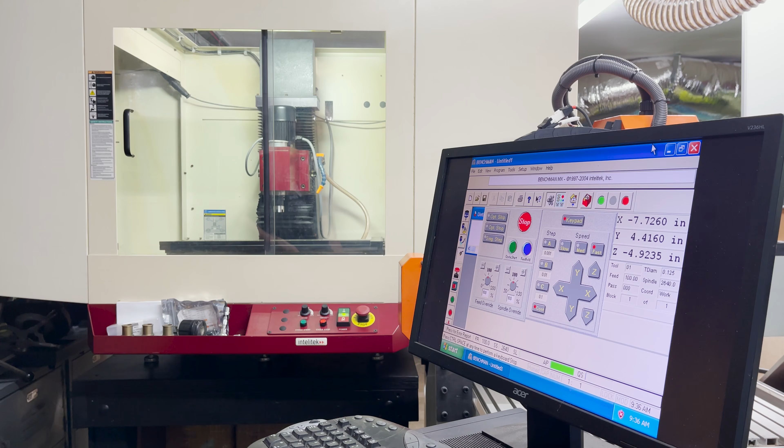Before starting any work on this Benchman MX, I jumped through some hoops getting this old Windows XP machine up and running so I could test out the machine with the original software. The software works great, however I'm a little apprehensive about moving forward with it, as if anything goes wrong with this old PC or the proprietary controller, I'm going to be out of luck getting any replacement parts. So I'm going to move forward with doing a full retrofit.

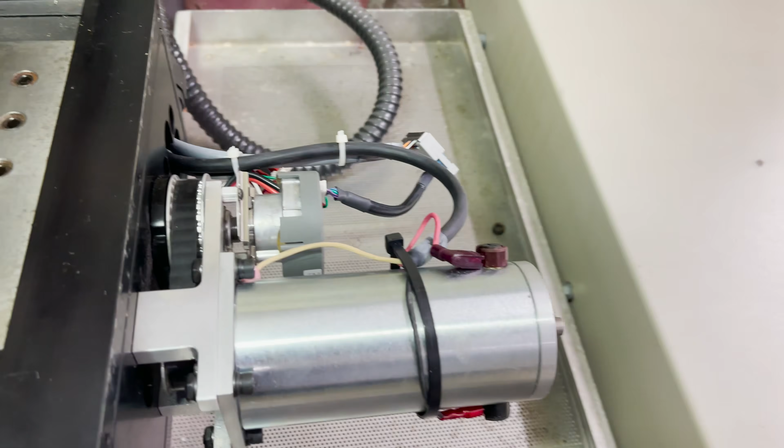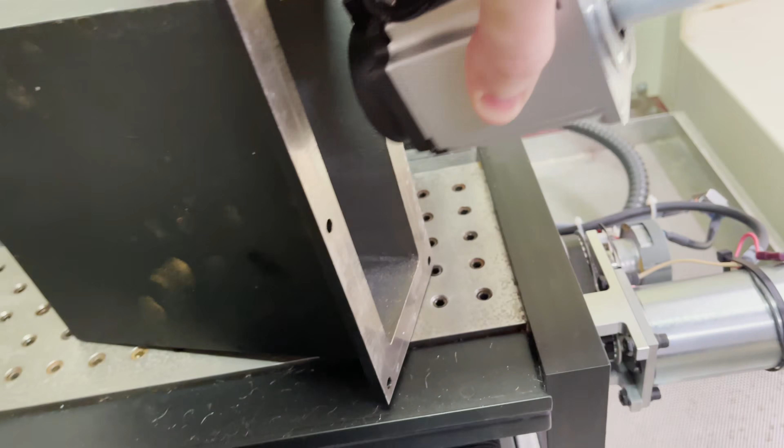So I took off the X-axis motor cover plate just to see what I'm working with here. You can see it's got a DC motor and then it's got a separate encoder. So the motors I was going to use are these AC servos, 400 watt, and it fits in here quite nicely, so I think that's going to be awesome.

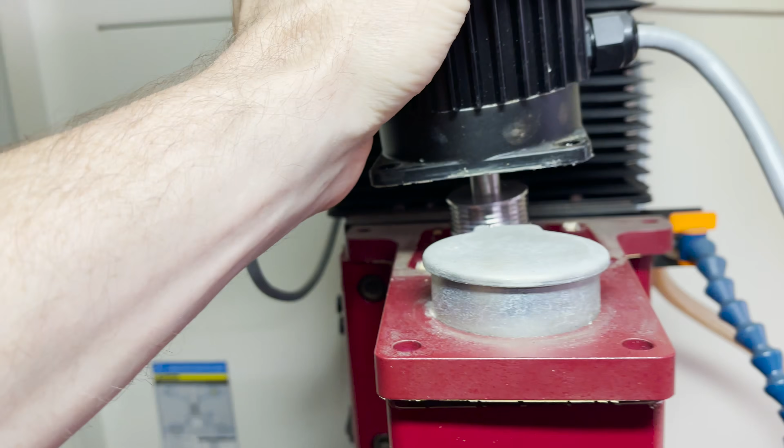I also took apart the spindle motor here. I noticed it wasn't working whenever I tried to test it. I don't know if it's the motor or the driver or who knows what. Anyways, I think I'm going to replace it with a 1 kilowatt servo motor.

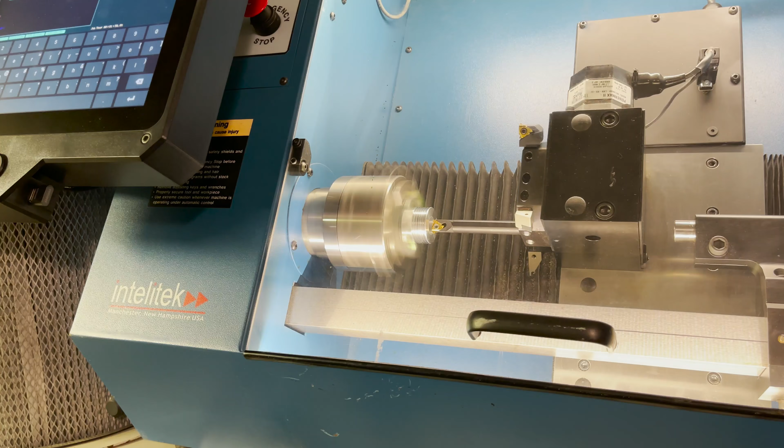See how that works? I've removed the pulley from this DC motor. I'm going to try to bore it out to fit this new servo motor. I removed the bulk of the material on the mill so I can fit my boring bar on the lathe. Alright, it looks like that's going to fit.

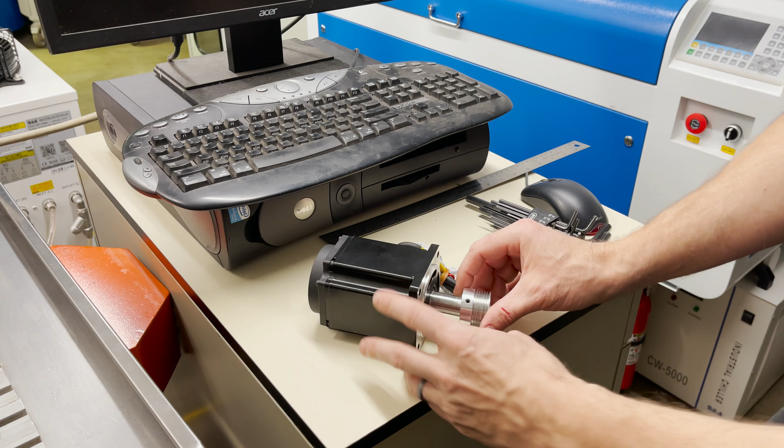Alright, let's get the Masso controller installed. I bounce around quite a bit in this project, as sometimes I only have a small chunk of time to make some progress.

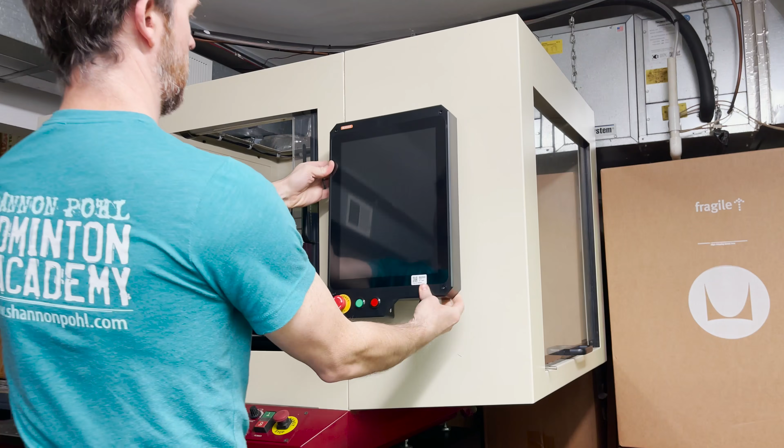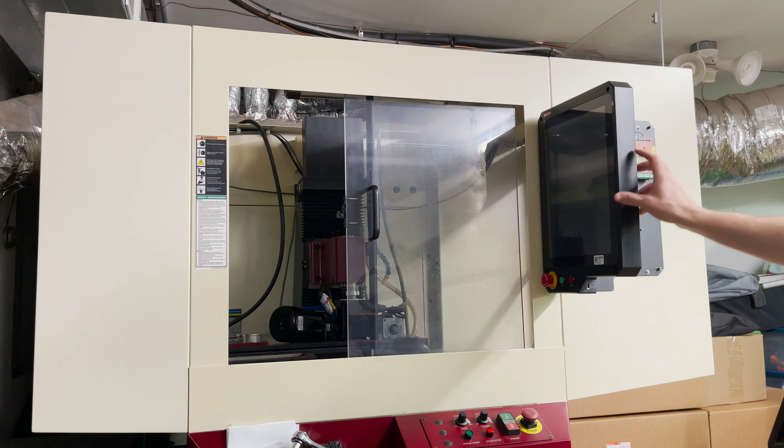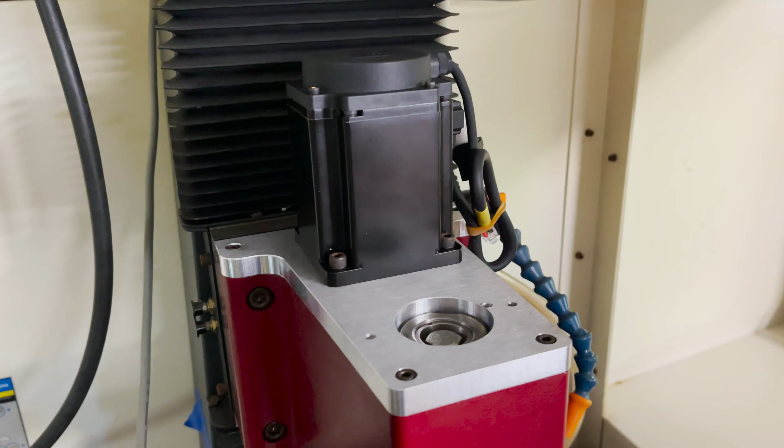Okay, I've got that installed along with the new 1 kilowatt servo. Next I can get the pneumatic power drawbar installed. Check out my other video if you want to see how I built that. Then I have to do some disassembly so I can get access to remove all the old motors and encoders.

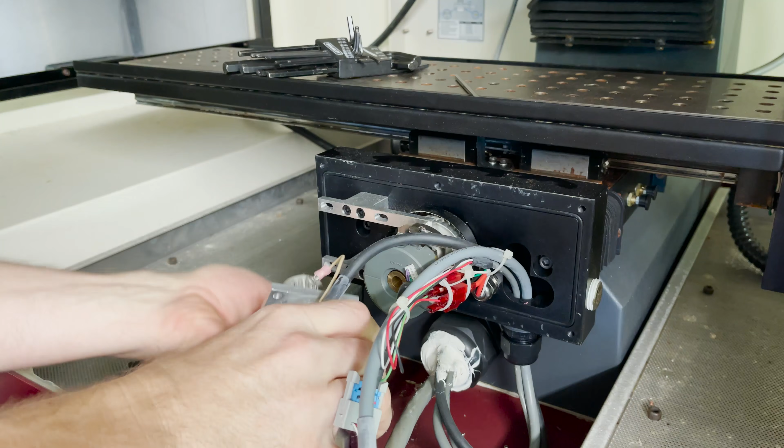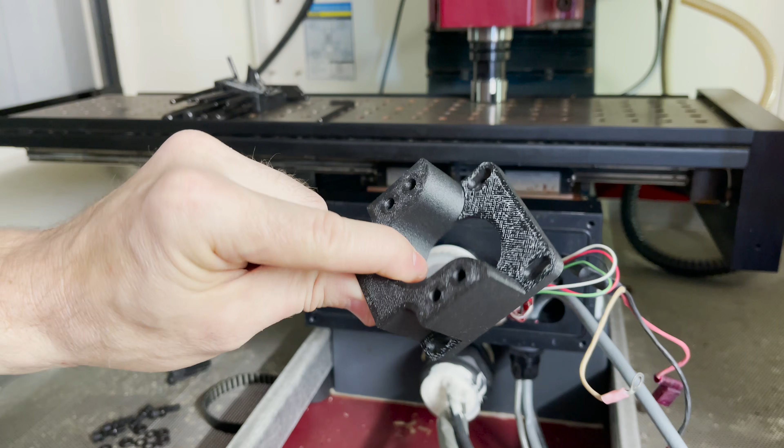I designed some new servo motor mounts in Fusion 360. Okay, here's my servo mount. I printed it out of a glass-filled ABS and it's extremely rigid. I was going to mill these out of aluminum, but I don't know, I think this might just be totally sufficient.

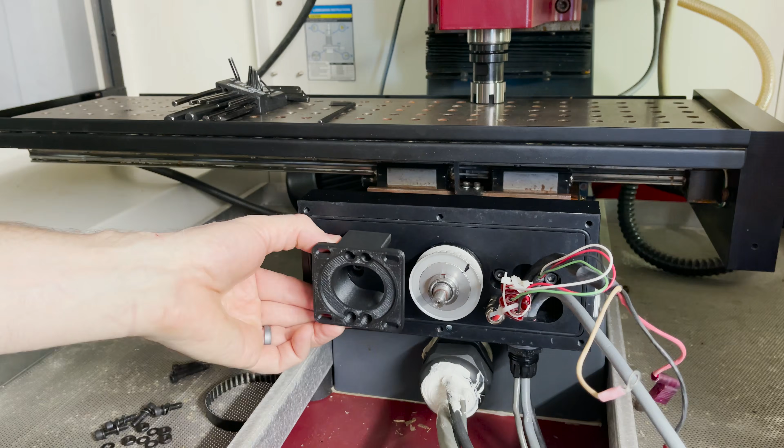I also modeled up some temporary pulleys and added some threaded inserts for the grub screw. You can see I've put on a 3D printed 14 tooth pulley here. This is just a placeholder. I have some on order from China, but they're going to take like a month, so I'm going to go ahead and move forward with these while I get everything set up and testing.

I get the Y-axis motor installed and the cables routed. That was kind of a pain, but I managed to get all the wires run for the servo motor back to the back of the cabinet, so I can go ahead and close this part up.

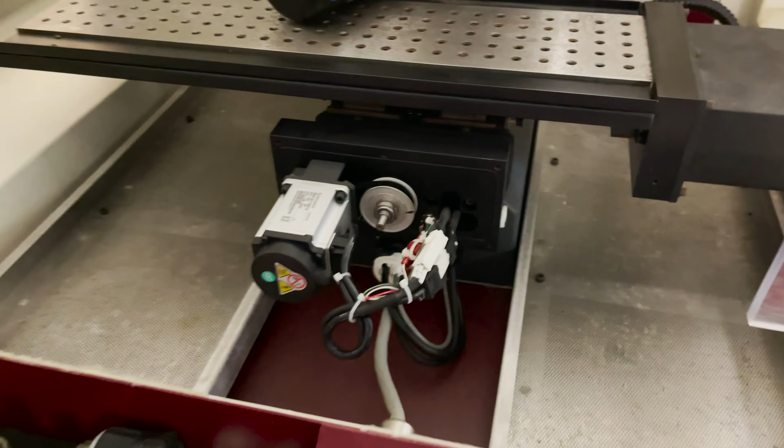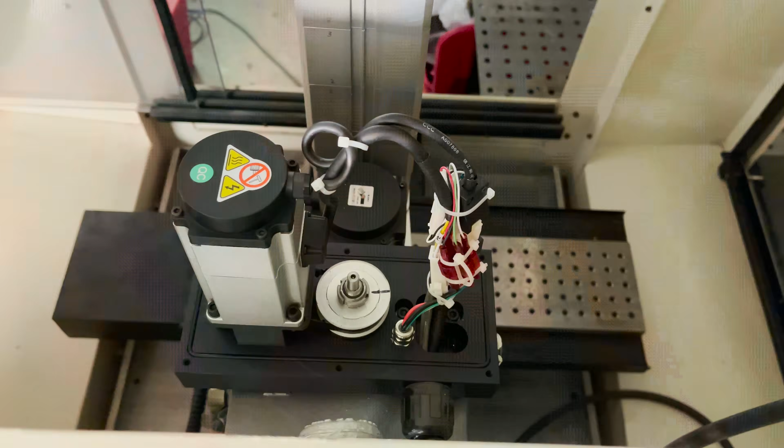Then I install the X-axis servo and get the cables routed. I'm moving right along here. I got the Z servo motor all wired up. Alright, with all the motors installed, now we can move on to getting this stuff wired up.

I've got the back of the unit opened up and I need to start removing old electronics.

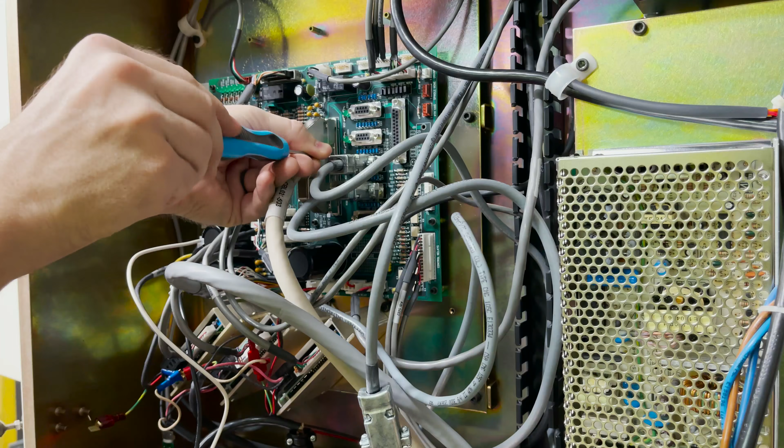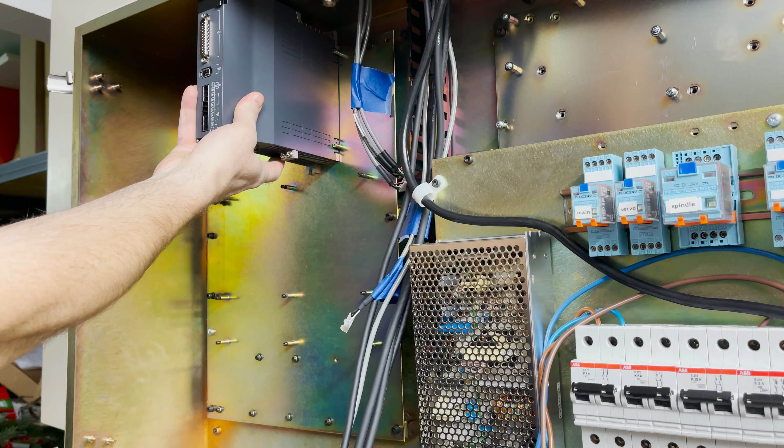My servo drives, they fit, but by the time I plug anything in, it's going to be too wide. So I think I might mount them over here.

I got the 4 drives installed. I think that's going to work fine. I can easily access all the menus to change parameters and stuff.

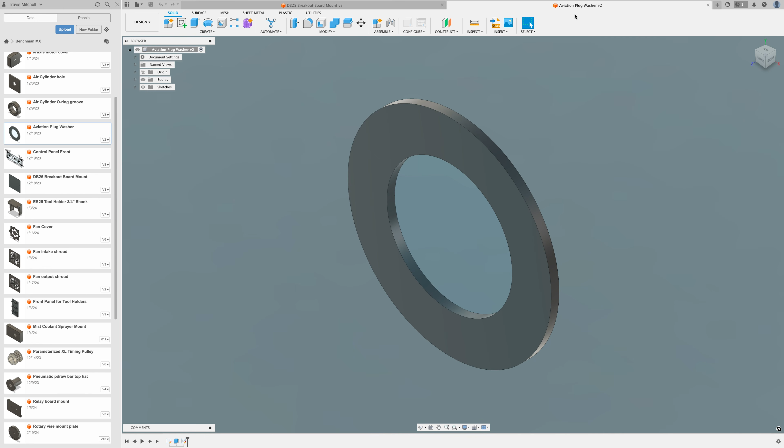I get files set up for some DB25 breakout board mounts and some washers for my aviation plugs to be laser cut.

There are the parts. They turned out fine. These are going to be mounts for these DB25 connectors.

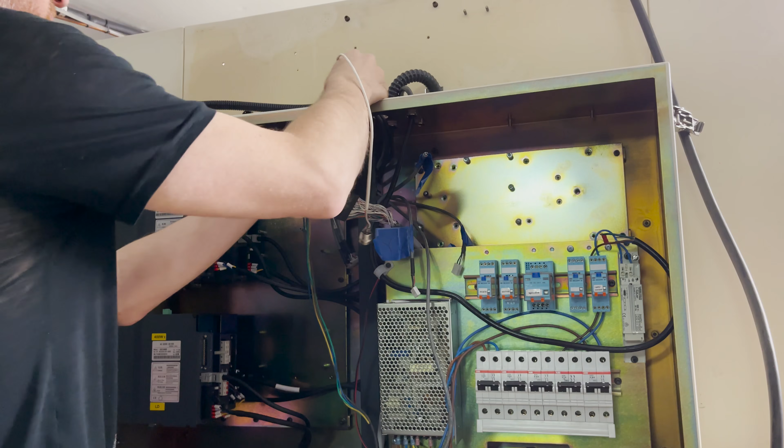I get these two aviation plugs installed. They're going to be connection points for my 4th and 5th axis. Then I can get the two stepper motor drives installed.

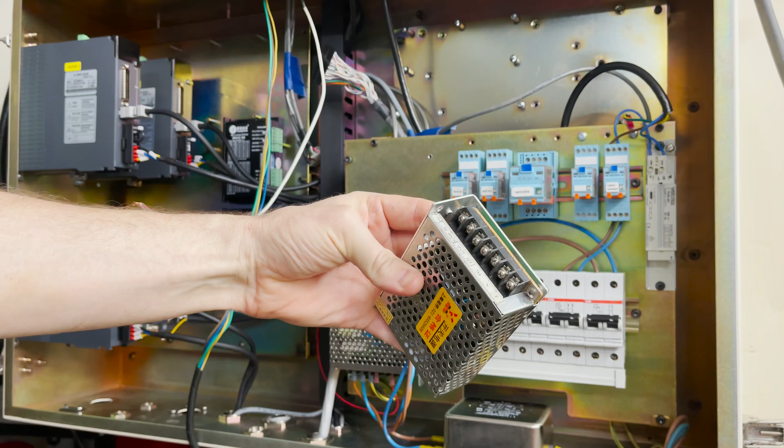I install one more power supply that can output 5 volts and 12 volts. I get the hook installed for the hand pendant.

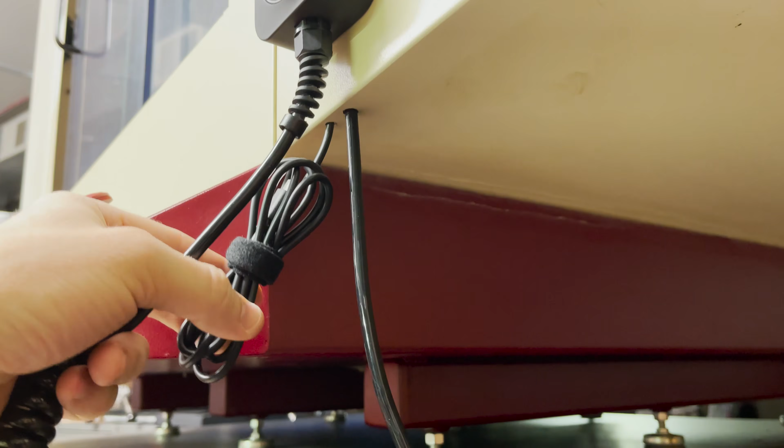Alright, I drilled 2 holes here in the base to run the cord for the Tormach 3D touch probe and one for the hand pendant. And I'll silicone those holes once I get them all set up.

I've 3D printed this mount for my tool setter. I think I'm going to put it over on this corner for now.

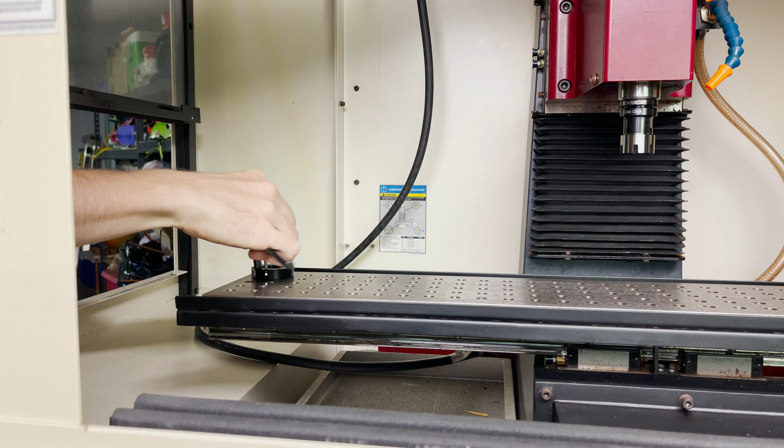Alright, that should work. Next, I designed this piece to mount my bank of solenoids to the back of the machine.

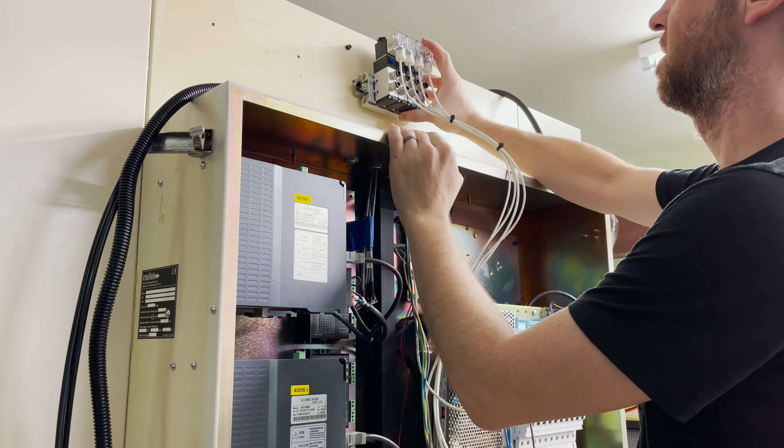There you can see my laser cut part mounted to the back of my bank of 4 solenoids. I could also mount it up here, right on these 2 threaded holes. Cool, I think it's gonna work well.

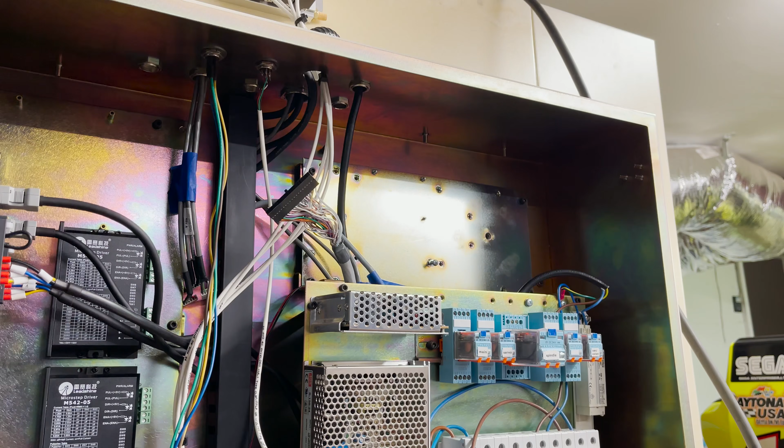Alright, I need to install some DIN rail up here. I'm gonna try to use these existing studs here so I can install this terminal block.

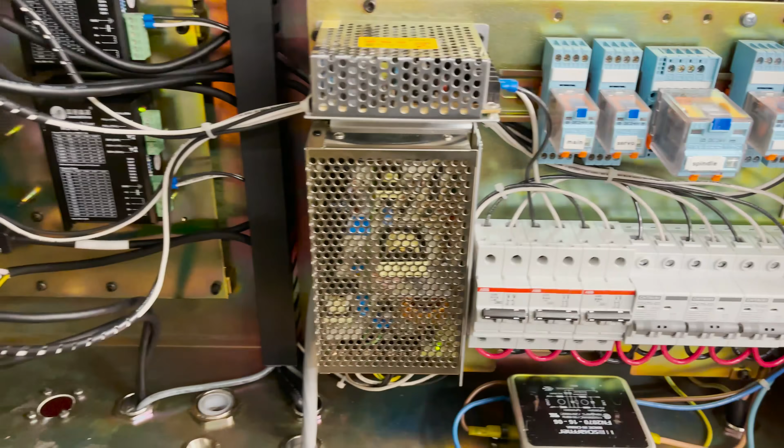Now I'm going to replace all these breakers with properly sized ones for my components. Alright, I've started running power to all the devices, and all the power supplies are wired up, all the servo drives and the stepper drives. So yeah, it's starting to come together.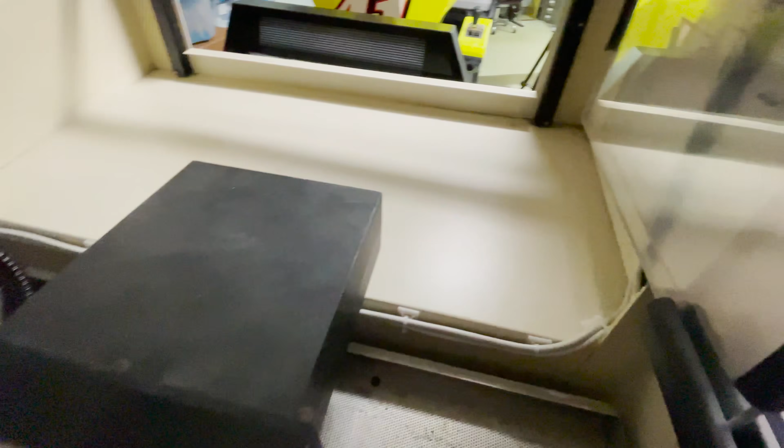I get the DB25 cables routed from the Masso back to the terminal blocks in the back. Alright, I got both of those wired up, and so now we can start actually hooking some stuff up. I like this original front control panel, but it doesn't have all the functionality that I need, so I designed a new one in Fusion 360.

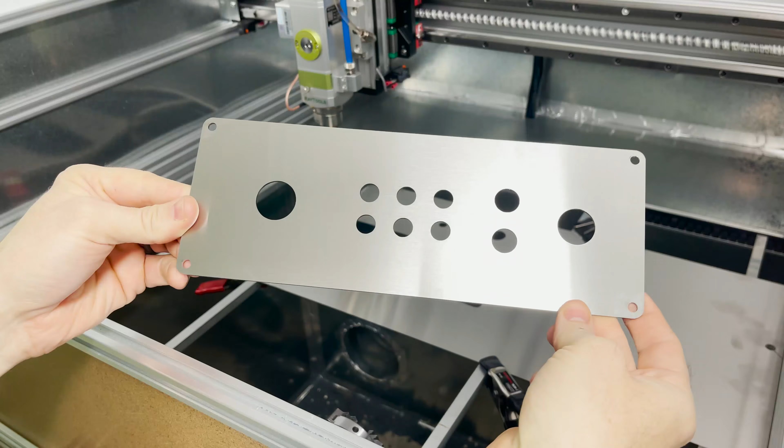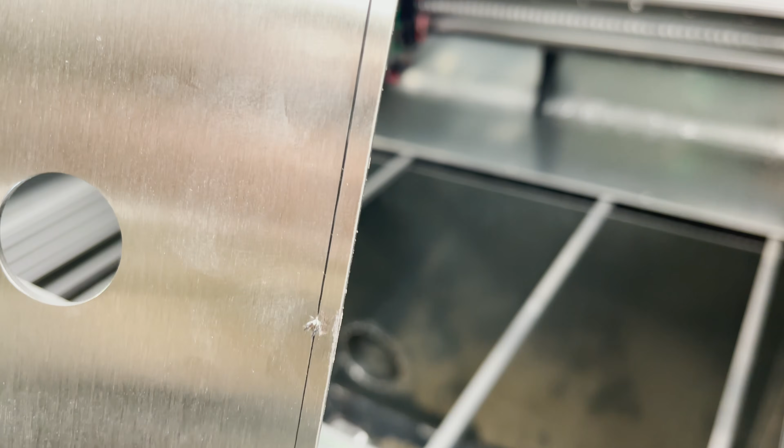You might have noticed this was my second attempt at cutting out this control panel. The first one I left these micro joints to hold it in place, but it really marred up the surface of the stainless steel. Anyways, now I can get all the buttons installed.

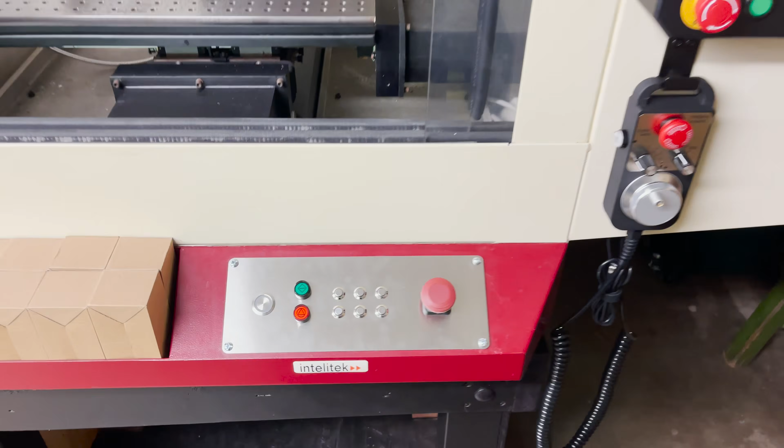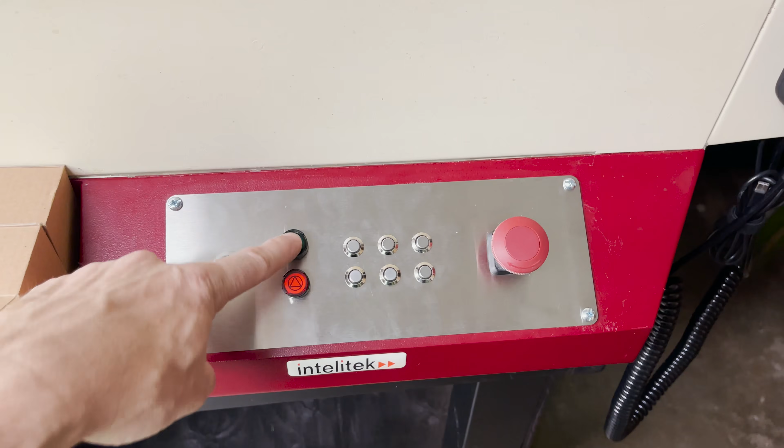Alright, well it's going to look something like that until I can get the graphics printed on it, or laser etched. We'll see what I end up doing. That will be the tool release button, program start and stop or feed hold, mist coolant on off, flood coolant on off, and two just auxiliary buttons for whatever I want to assign them to, and then e-stop, of course.

Once I get my UV printer fixed, I'm going to try to print the graphics of like this emergency stop and some labels and stuff. And I finally get some power hooked up to the Masso through a 1 amp fuse.

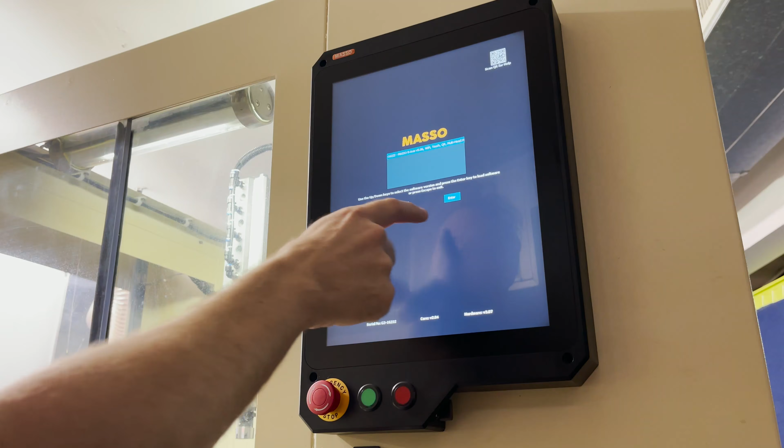I load the software on a USB drive and get that installed. And it's up and running.

Alright, I got my cables ready for the 3 servo motors for the gantry. Go ahead and get those installed.

Alright, if I did everything right, the motors are all wired now, so let's turn it on and see if I can put in a few default values and get them to move. You can see I can jog everything now.

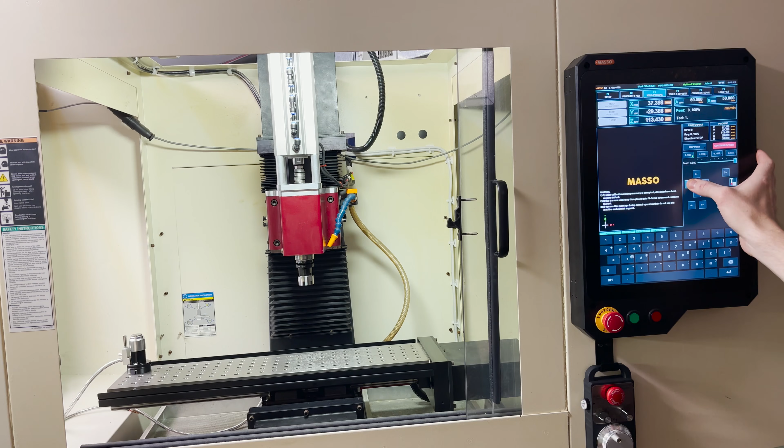Cool. Now I need to adjust some parameters in the servo drives and change the encoder resolution since it's geared down by 2 with the pulleys. Alright, after that adjustment, you can see it's jogging twice as fast now.

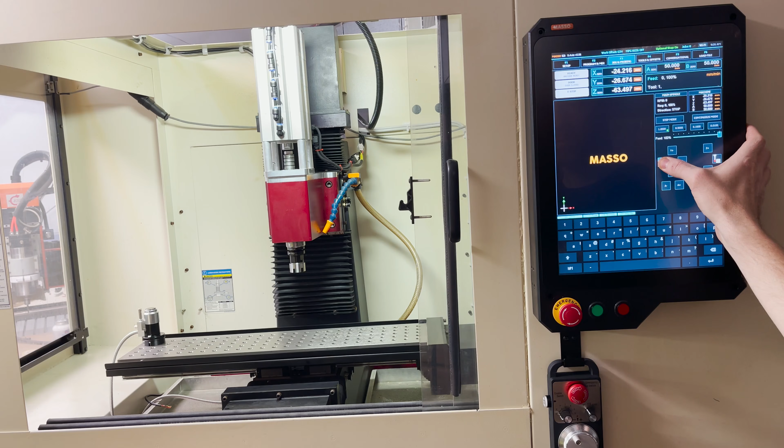Alright, I'm ready to wire up this servo driver for the spindle. Got it plugged in on the other side. Alright, cool. Now I can hook it up on the front side. Alright, last 2 wires here, then the spindle should be good to go.

I'm going to control it using step and direction signals, so I can do clockwise or counterclockwise if I need. Alright, let's see if we can make this spindle work.

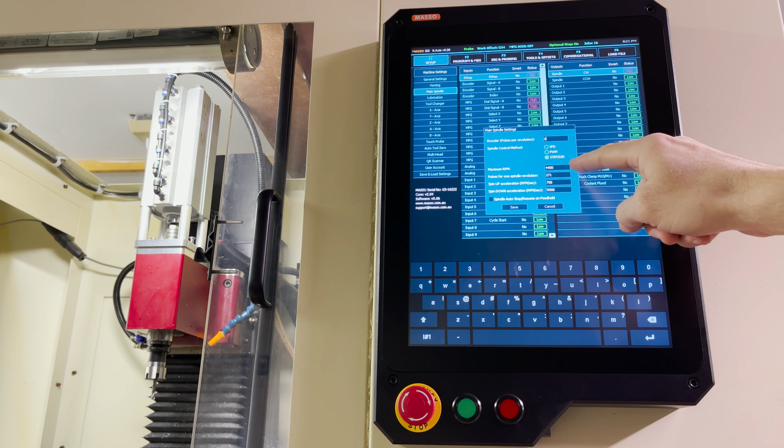Because my servo motor has a max RPM of 6,000 and there's about a 1 to 0.7 gear reduction with the belt and pulleys, I have the max RPM at 4400 right now. I'll probably see if I can do something about that later and change the pulley ratio to get more RPM out of it. So let's try that.

Alright, let's try clockwise. And counterclockwise.

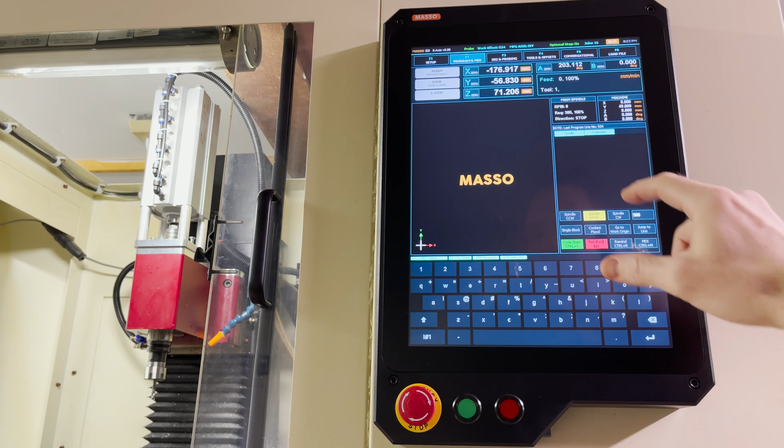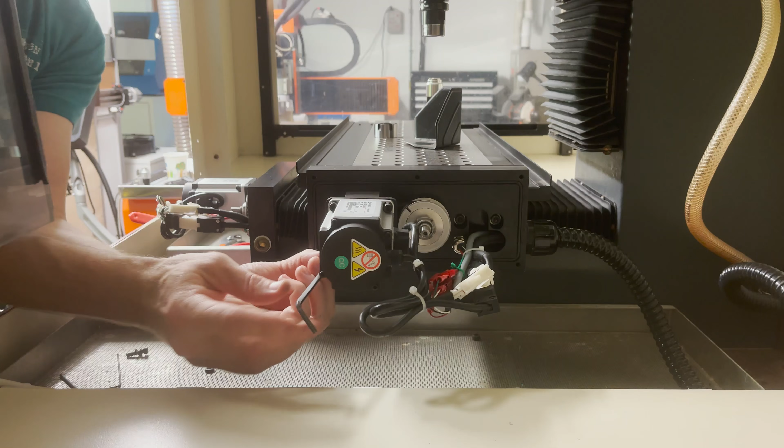Awesome, cool. Alright, my actual 14 tooth pulleys came in, so I'm gonna swap out these 3D printed ones. I go ahead and finish swapping out the pulleys and getting all the motors reinstalled. Next, I solder up this connector to get the hand pendant installed.

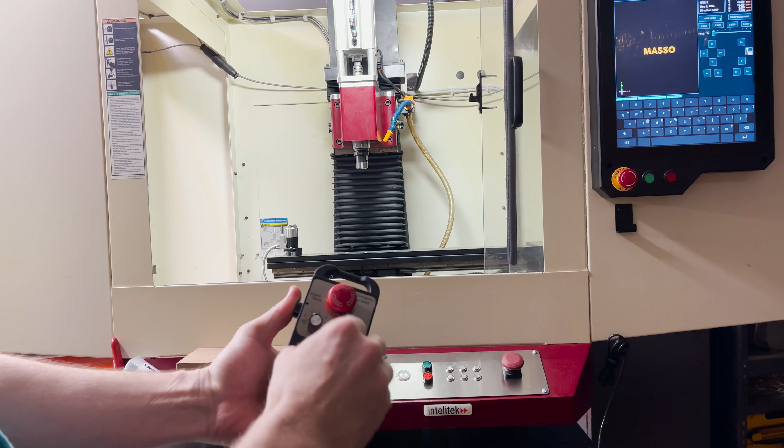Alright, the pendant's all hooked up and it looks like it's working. I can put on X. Y. This stuff works. I got my 4th and 5th axes set up.

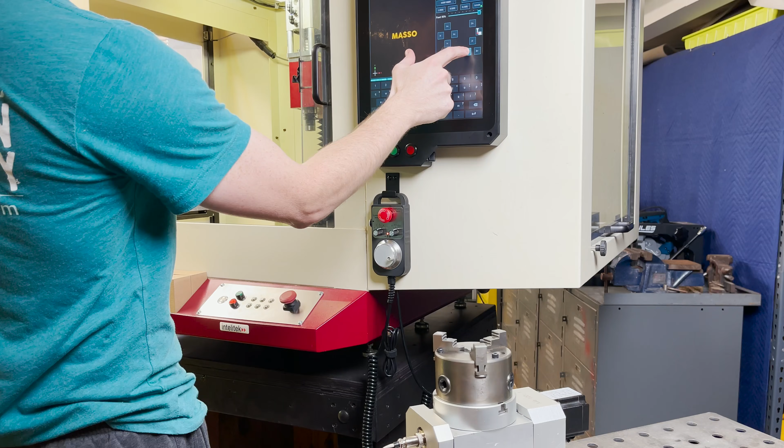I need to make a hole for the cooling fan for the control cabinet. These cordless drills just love 4-inch hole saws. They've been through much abuse and it'll be fine after it cools down, but I have another one for now. I know some people like to knock Ryobi tools, but I've had these for years and they just won't die.

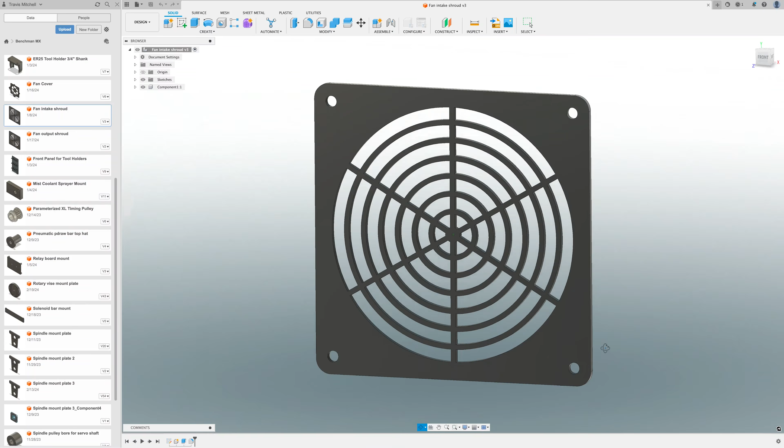And that should move some air. I also need to make a hole for air input on the door. So I model up a quick cover plate, 3D print it, and get it installed. That should work. Next, I model up this adapter so I can get my mist coolant sprayer mounted.

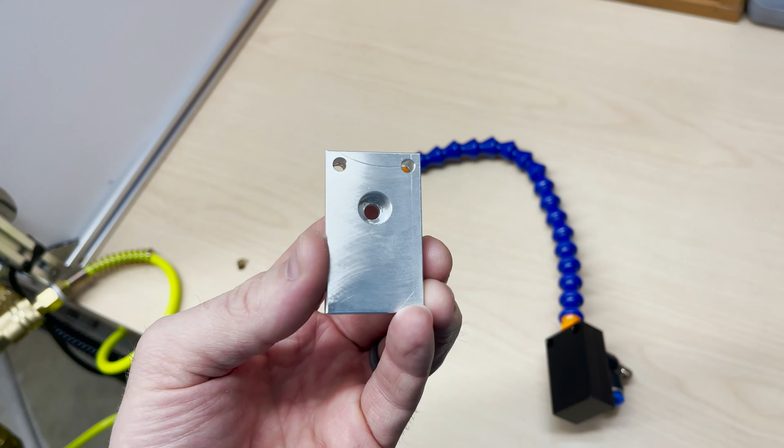There's the finished piece. I just have to tap a couple holes and get that mounted. Alright, looks like that's gonna work nicely.

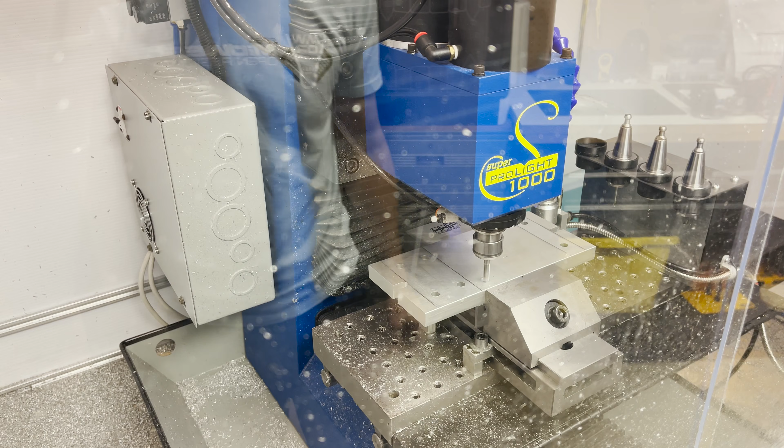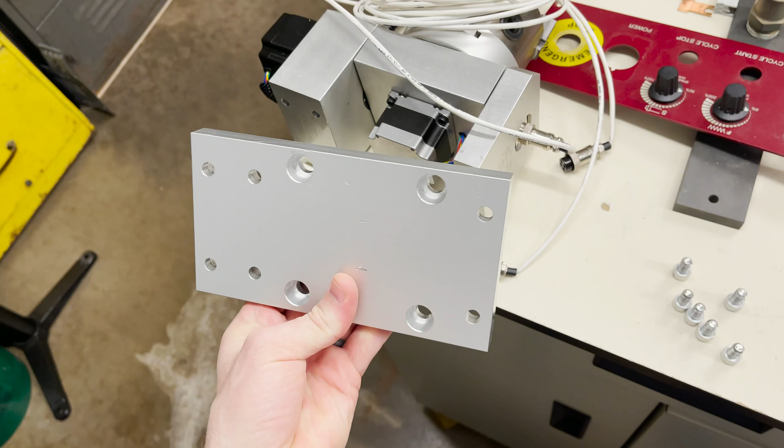I need to make some holes to mount my trunnion table, so I set up a file here to do the job. Here's my modified plate, so now I gotta get this back together. I got the 4th and 5th axis installed on the side with the modified mount, so we'll try that.

Next, I model up this tool holder rack. I'm gonna laser cut the back panel and 3D print all of the individual tool holders.

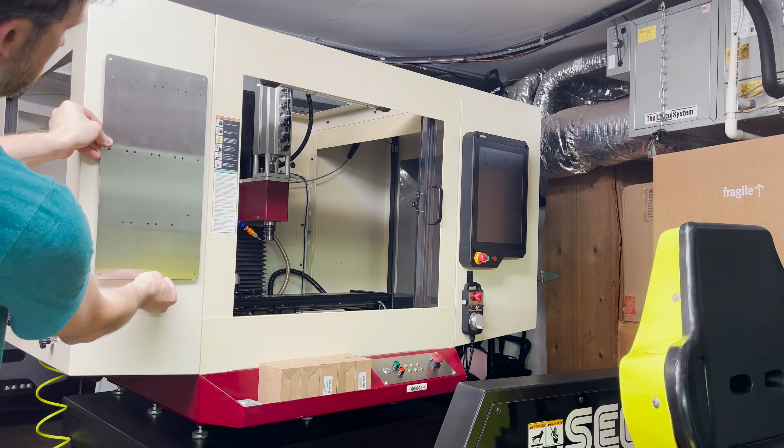Here's the finished panel. I deburred that one area and knocked out the holes. I'm going to mount it somewhere right about here and attach all the tool holders.

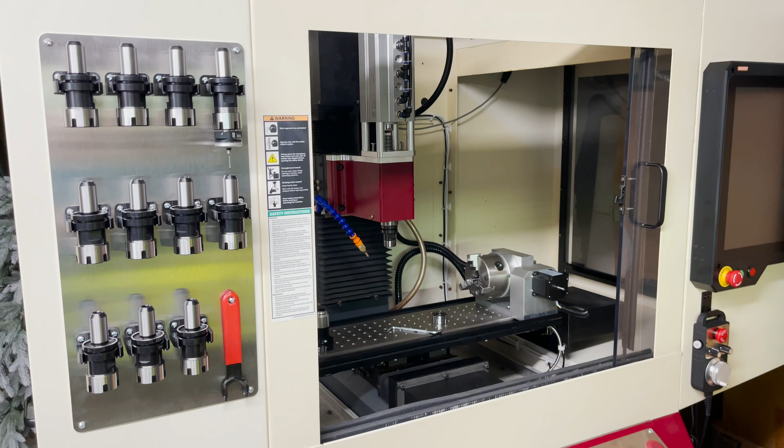Alright, last tool holder. Cool, I think that turned out pretty nice.

It turned out the original type of relays aren't going to work with a Masso, so I bought this little breakout board with 4 relays and 3D printed this little mount for them.

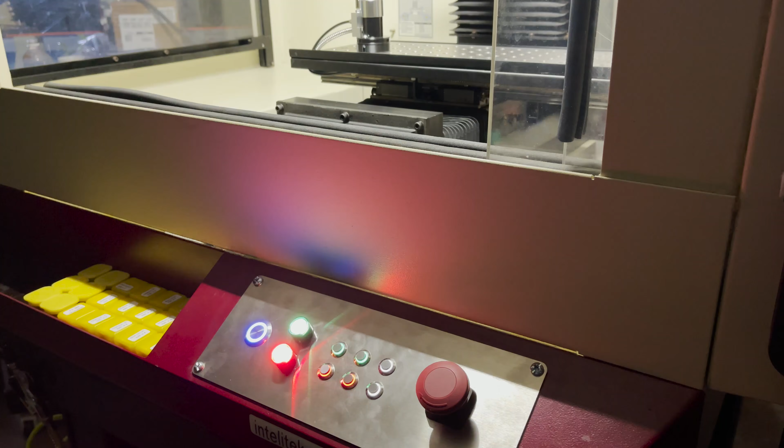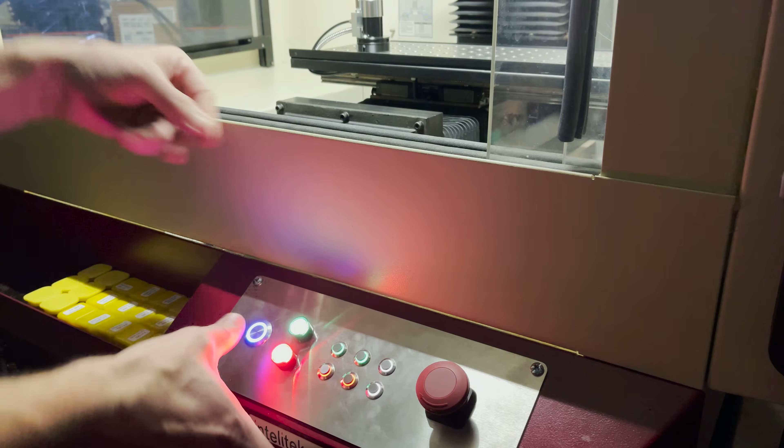Alright, I got my front control panel done except for printing the graphics on it. E-stop works, mist on and off, and the spindle release button. Right now I have this one for homing, and I'm unsure what I want to assign this one to yet.

Okay, I'm ready to mount the vise, but there's this little lip on the chip tray that interferes with it, so I need to make this little riser plate for it to set on.

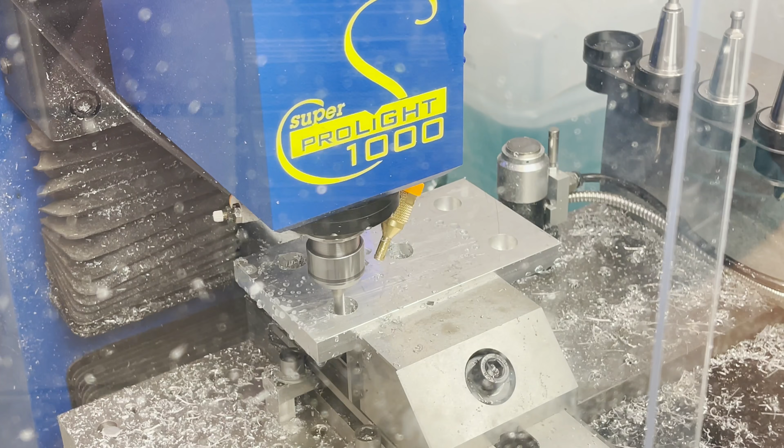Here you can see the little lip that's in the way. Alright, I've got this plate mounted here, and I'm just going to take and use a face mill and mill off that top surface so that it's all level with the machine.

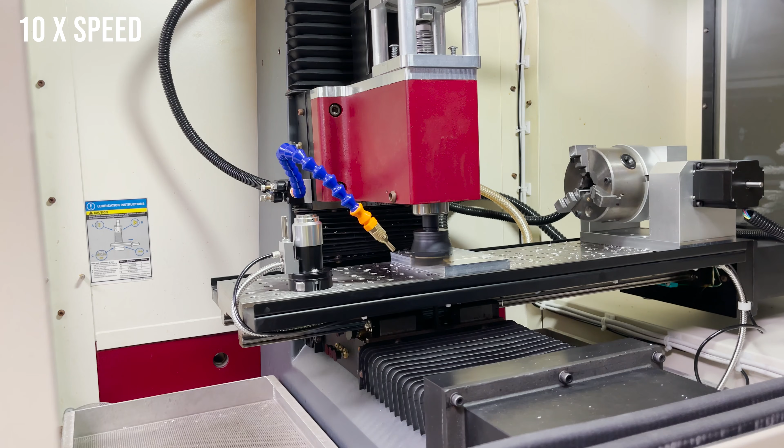Okay, now we need some vise clamps. I set up this design in Fusion 360 just for dimensions. They're simple enough parts, I'm just going to manually mill them.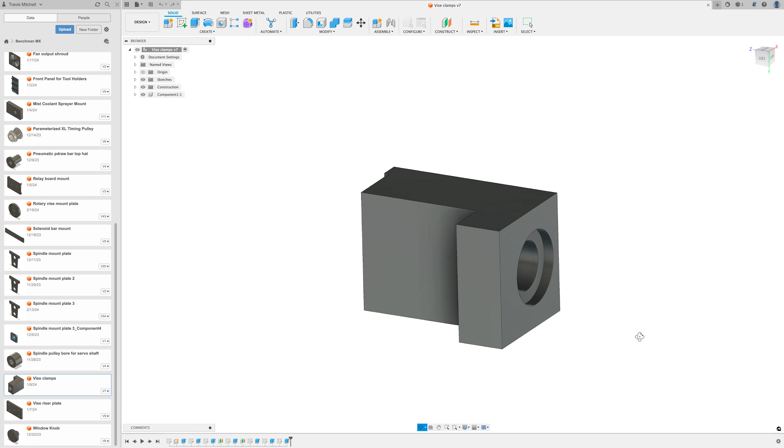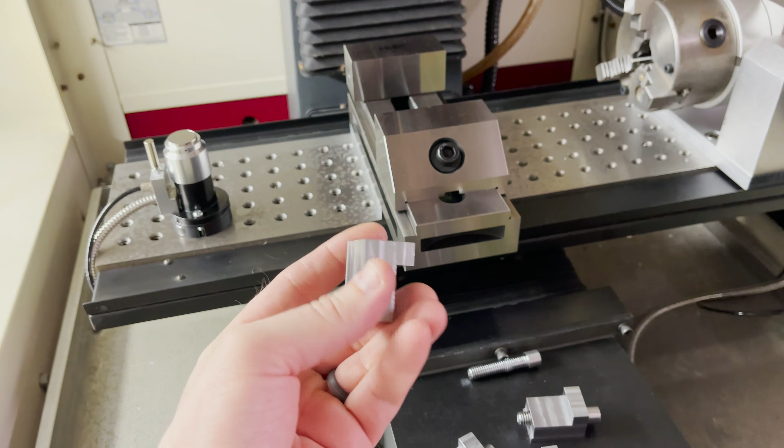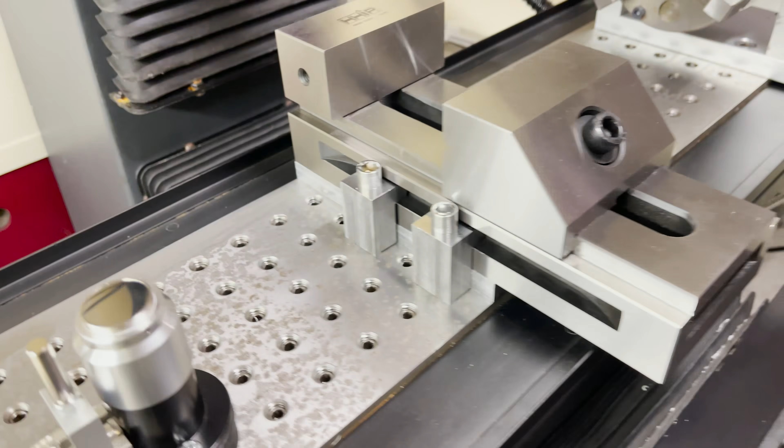Alright, I've milled out some proper vise clamps out of steel this time, so let me get those installed here. Alright, those turned out really nice. Now I just need to tram in the vise, and then I can start making some test cuts.

While I have the dial indicator out, I go ahead and precisely calibrate all of the steps for the servo motors.

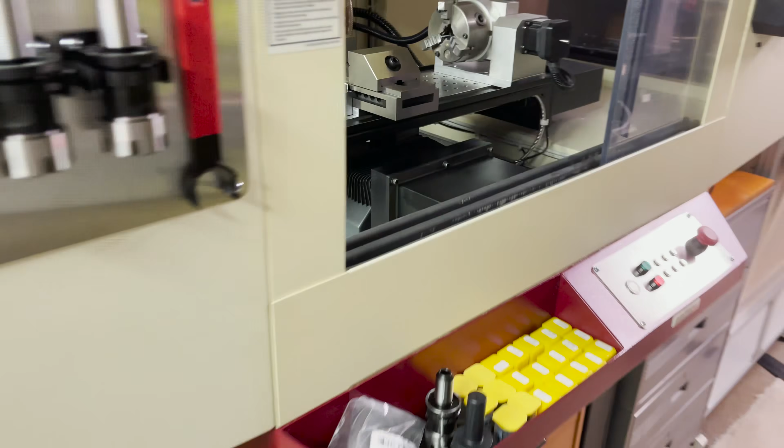On my Super Pro Light mill, I started out with 3D printed clamps, and then I upgraded to these aluminum clamps for the vise. And now, as a first test job on the Benchman, I'm going to mill out some new vise clamps out of steel like I did for this machine.

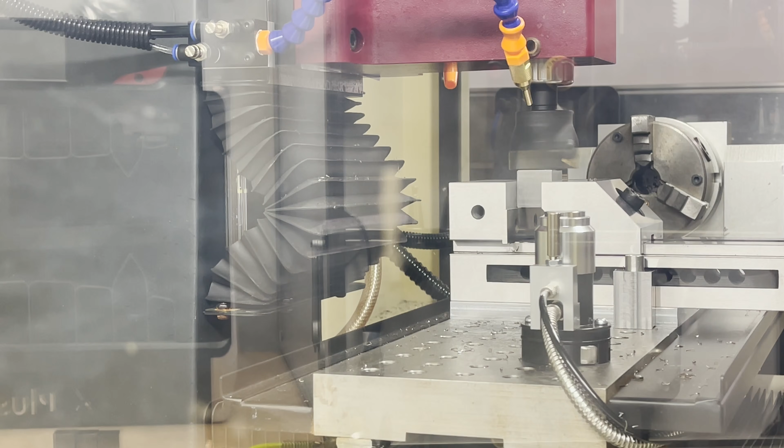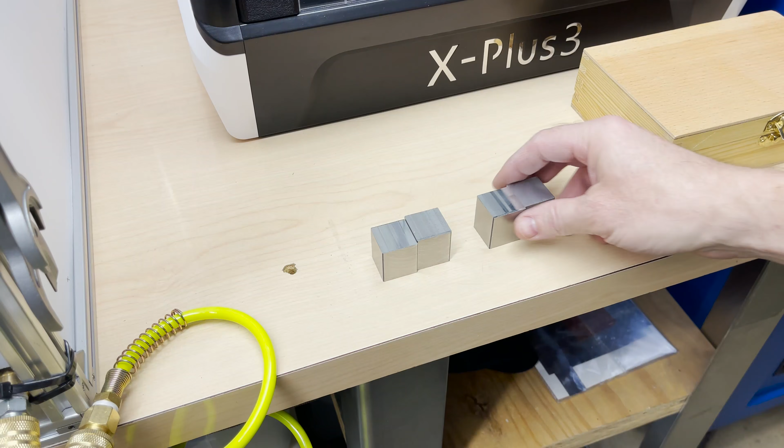Alright, I got my 4 pieces of stock cut off. Now I'm going to start manually bringing them down to dimension. 4 pieces squared up. I probed the corner so I can calculate the position of the hole I need to drill.

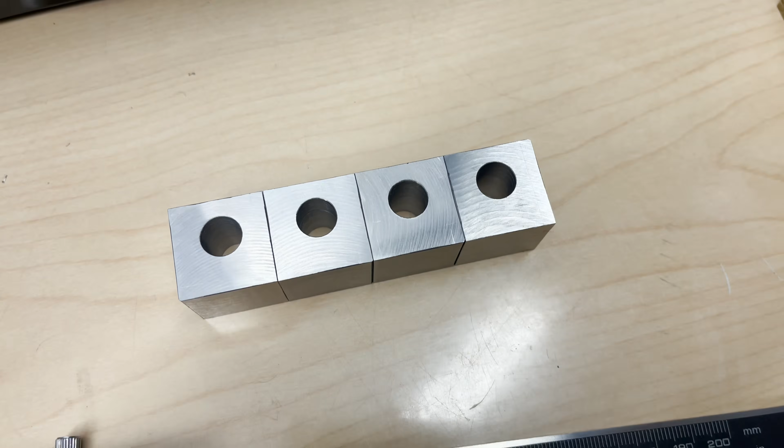Alright, so far so good. Just one more step and then they're done.

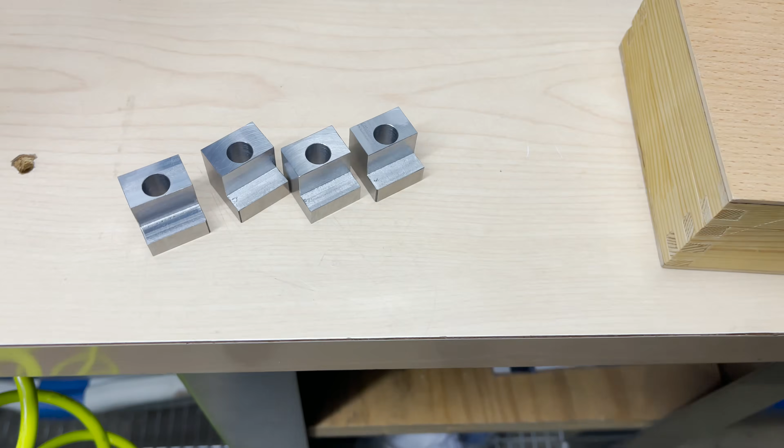Alright, they turned out pretty nice and the new machine was a real pleasure to use. So let me get this cleaned up and installed.

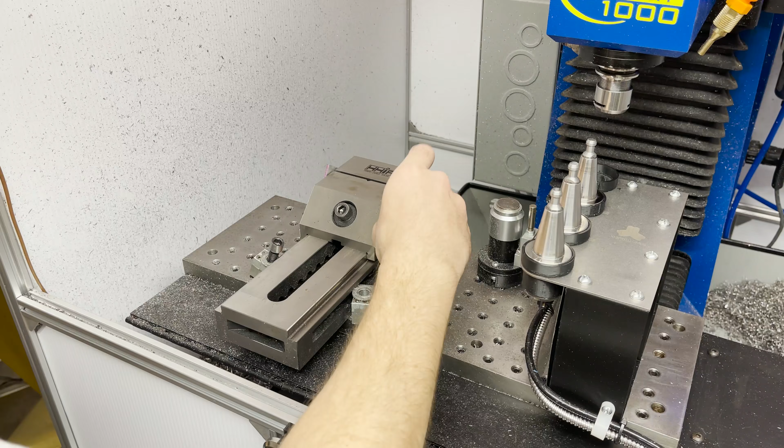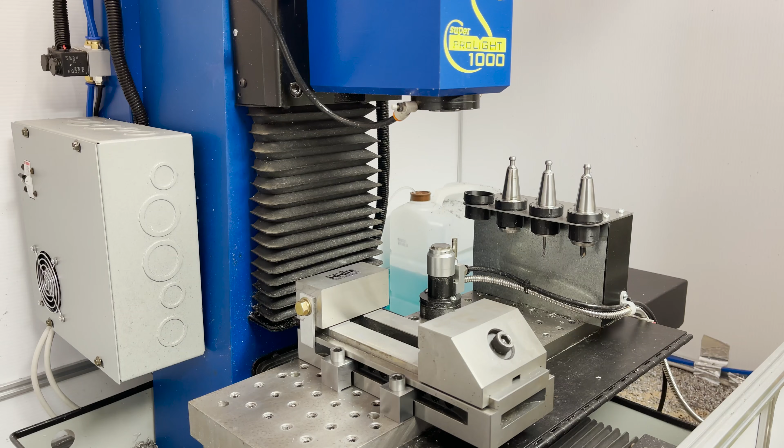I'll go ahead and get this trammed in for the new lucky owner of this machine. At the time of editing this, I've already sold this Super ProLight. It served me very well over the past year, and I'm really going to miss the ATC. But I'm looking forward to using this Benchman MX.

I got to the end of the video here and I realized I really never explained why the upgrade. The Super ProLight was a great machine and I'm really going to miss the ATC part of it. But this machine has several things that I consider upgrades.

So one is obviously the enclosure. It's all set up for flood coolant. I just need to get a pump and get that installed.

Also, this machine has 6 inches of extra travel in the x-axis, which allows me to set up the rotary and leave it there permanently, which is awesome.

Also, this machine has slightly beefier square rails instead of the round rails on the Super ProLight. That in combination with the servo motor as the spindle, I get much better low-end torque and I've noticed better surface finish, which is awesome. And also, I just enjoy retrofitting these machines.